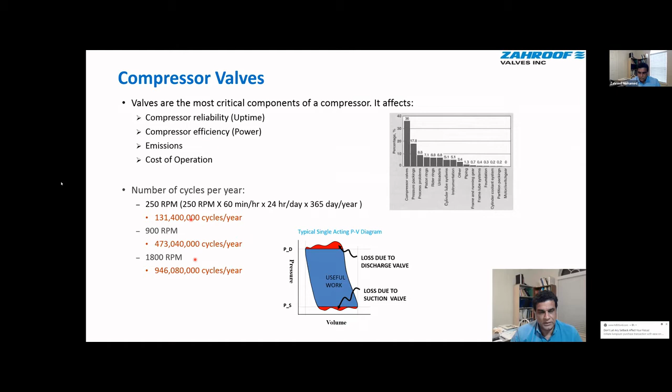This slide shows pictures of the typical conventional valves that you see today. On the left you have the plate valve, you have the ring valve, and then you have the poppet valves. In the case of all these valves, you have the valve seat, which is responsible for taking the pressure differential across the valve. You have the sealing element, which is the plate in this case, the rings in this case, and the poppets in this case, and the sealing elements are actuated by springs. The spring is guided inside the guard of the valve, and the guard is also responsible for controlling the lift of the valve.

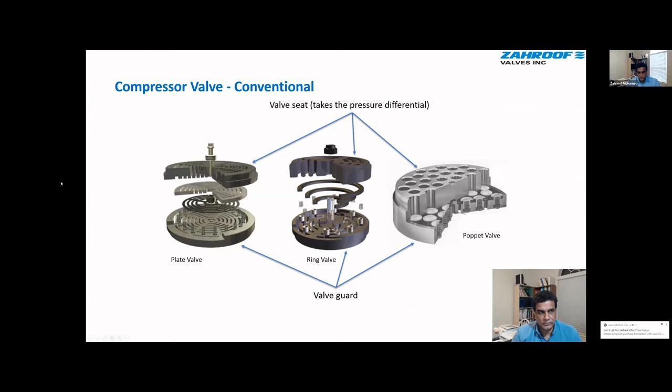This slide shows the evolution of valves over the years. The plate valve was invented in 1895, and if you take a look at the plate valve design, the flow of the gas through the valve hasn't changed since it was first invented. Similarly, the same is true for poppet valves, which were invented in the 1950s, ring valves, introduced in the 1930s, and channel valves in the 1940s.

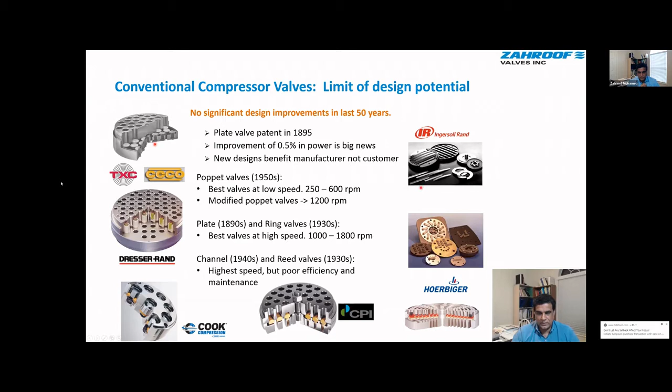So the major issues with conventional valves are as follows. Number one, when the valves fail, they have to be serviced. In order to service a conventional valve, you need to take it outside of the compressor, send it to a precision machine shop, and there they will check the valve seat and guard against a drawing to see whether it's within spec. If it's within spec, you would machine it and bring it back to its good condition, and you would always replace the internals, which is either the plate, springs, etc.

And this requires a long lead time. It also requires skilled labor, and it also requires the user to have a full set of spare valves on site. The other big issue with valves is that it's the number one cause of unscheduled shutdowns.

The mean time between service in a valve really depends on the application, but in the case of upstream applications where the quality of the gas can be bad, it can be anywhere between 3 days to something like 6 months. In pipeline transmission applications where the gas is clean, in the case of a high-speed compressor, the service interval is more like a year for valves. In downstream applications, typically it's about 2 years, but in dirty applications, you see things like a couple of months.

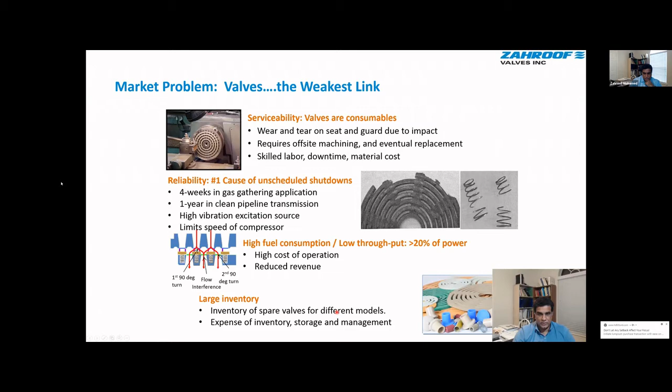So the StraightFlo valve is a patented drop-in compressor valve, and there is no requirement for modifying the cylinder of the compressor. The smallest diameter it comes in is about 1.5 inches, about 38 millimeters, and there's really no upper limit. We have valves which are more than 14 inches in diameter.

There are more than 15,000 of these valves currently running in the field, and they are in all brands of compressors, including Ariels, Coopers, Dressers, Ingersoll Rands, etc. These valves run in applications ranging from 200 RPM to more than 3,600 RPM.

The maximum pressure differential that a valve can take across a single valve is 4,350 psi, about 300 bar. And the temperature it can be used in is anywhere from cryogenic minus 300 degrees Fahrenheit to 500 degrees Fahrenheit continuous temperature. These valves have an industry-leading 10-year warranty on the stainless steel housings. In slow speed applications with pipeline quality gas, we also have a warranty of 5 years. And in downstream applications, typically, it's about 3 years.

These valves actually improve the reliability of the compressor by anywhere from about 5 to 15 times. That is the mean time between shutdown of a compressor due to valve issues. And we actually guarantee that this will be at least 2 times that of the previous valve for the same conditions.

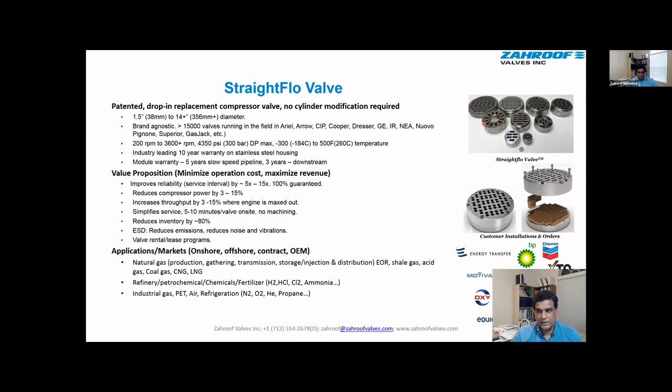So essentially these valves are modular reed valves. You have a valve seat, and we call this a valve carrier because it's really not a guard - its function is purely to carry these modules, and inside the valve you have a number of modules.

These modules are all the same size or dimensions on the outside, so whether the valve is 1.5 inches or 14 inches, it has the same modules in it, but the 1.5 inch valve has fewer modules than the 14 inch valve. These modules can be interchanged between valves, and they're held stationary between the valve seat and the valve carrier.

In order to service these valves, all you do is remove these modules using your hand. No special tools are required - you basically remove the bad modules and replace them with good modules. This can be done on the compressor site. There's no machining involved, very little skill involved, and it takes 5 to 10 minutes to do.

This picture shows a cross section of a module. You have a triangular part with reeds on either side, and when there's high pressure on the inlet side of the valve, the reeds deflect and allow the gas to flow through. The gas flows through in a straight line, with very little turbulence or mixing.

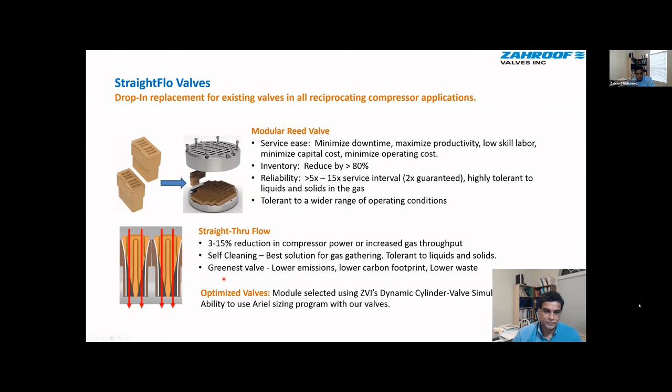When you do have to service it, you don't have to send it out or machine it - it's very easy to replace the modules. The inventory is low, so there are a lot of savings. You don't even have to leak test these valves like you would with a conventional valve, because every module comes leak tested, and it seals against the valve seat, which is not machined or changed from factory condition.

So the cost of maintenance of these valves, and of the compressor overall, is much lower than with conventional valves.

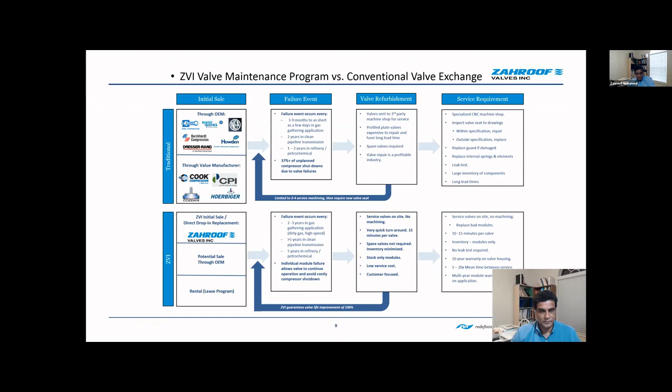This shows our dynamic simulation program, used to simulate a valve in a given compressor for a given application. The output includes the pressure on either end as a function of crank angle, the PV curves on the head and crank end, and the movement of the reed as a function of crank angle, or lift. No assumption is made that the valve is fully open when the pressure differential reaches a particular point.

This also gives you the rod load, which is a combination of the inertia load and the gas load. This is a picture of our standard valve, and this shows our valve with an integral cage. Our valves can have an integral cage because it's no longer consumable.

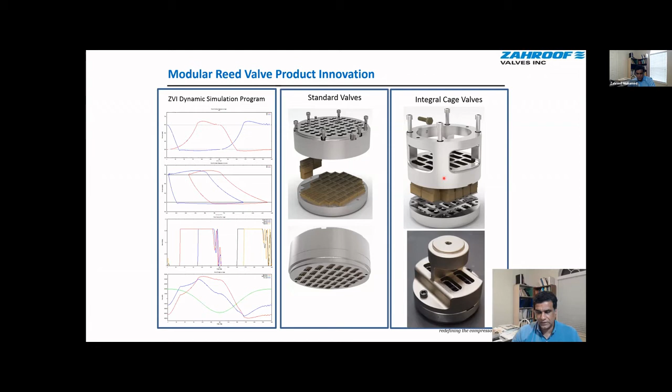This is the valve protection mesh, introduced two years ago, which protects the valve as well as the cylinder from liquid slugs and solid foreign objects in the gas stream. These are used only on suction valves, as the last line of defense, since these things can cause a lot of damage.

These are called high efficiency valves, because within a given diameter of a valve, we can fit a lot more modules, which increases the flow area much more than our standard valve.

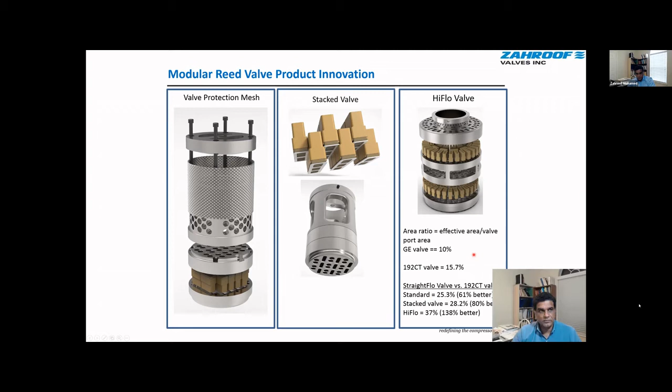Our valves can also be unloaded. In the case of a plug style unloader, we have a drop-in replacement valve which works with your existing actuator - you don't have to change your actuator.

We also have a drop-in replacement for finger style unloaders, using your existing actuator to replace your existing valve with finger unloaders. In fact, we have three different unloader technologies for our valves, which are much more reliable than a finger unloader, where a metal finger pushes down against a highly stressed plastic plate, which can cause reliability issues.

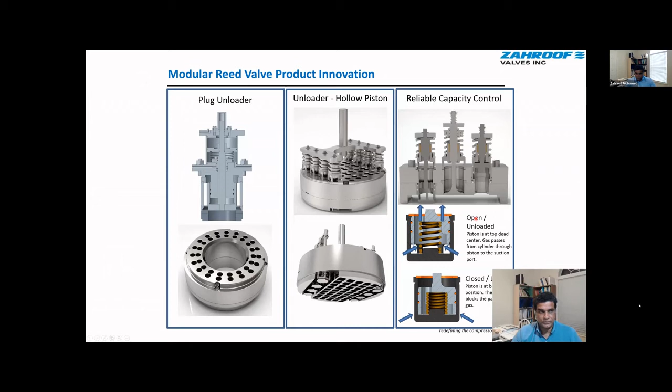We also have concentric valves. This one goes into a gas jack compressor, and this is a valve where we've integrated the valve cap as well as a cage, which goes into a Gemini H302 compressor.

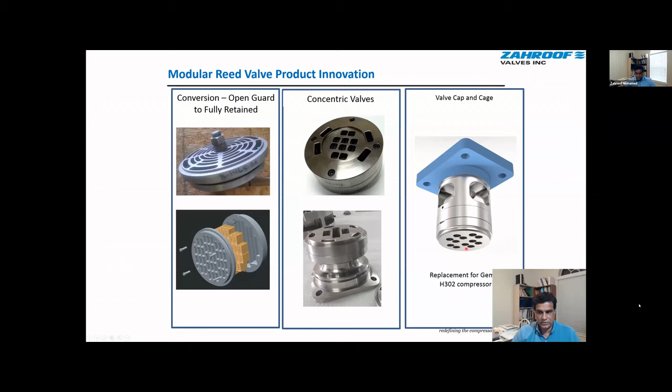These are products used pretty much in compressor stations. This is a replacement for a double deck valve, and this is a replacement for a parallel flow valve - actually a new valve with much higher efficiency than double-decker valves or parallel flow valves.

We're seeing a drop in power of about 15%, which can be converted to a 15% increase in flow per compressor in a compressor station. We also make scavenger valves for two-stroke engines, for instance, and these use exactly the same modules as our other valves.

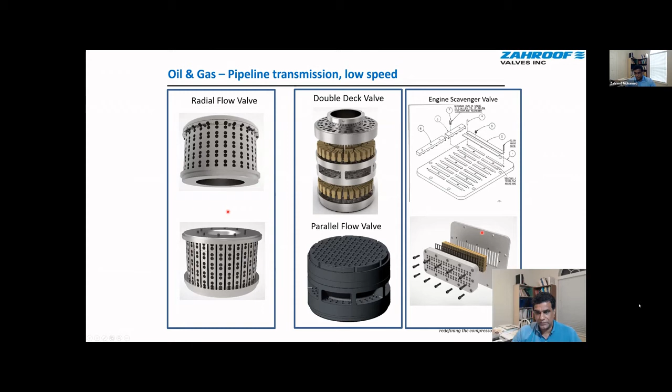So there are a lot of old compressors, especially Ingersolls and Dresser-Rands, in which the valve is retained by a jack bolt, and these valves are notorious for being difficult to maintain, with issues with emissions and difficulty in tightening the valve cap bolts versus the jack bolt. So we have a field conversion for this valve where we replace this jack bolt cage with a cage and a valve cap with an O-ring.

So we put in a conversion ring in the cylinder. There's no machining required, it's a drop-in kind of thing. It takes maybe 15 minutes per valve location, and we use a valve and solve the problem of maintenance and reliability that you have with jack bolt retained valves.

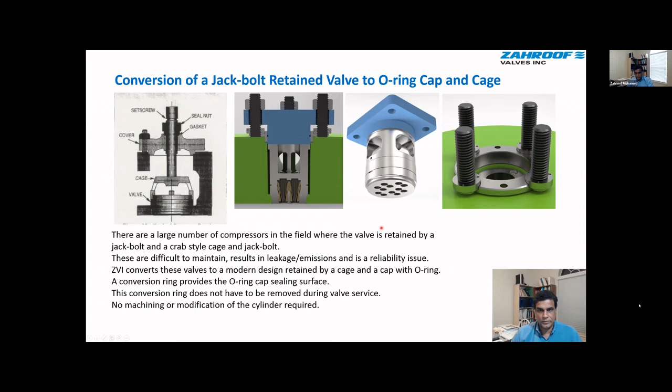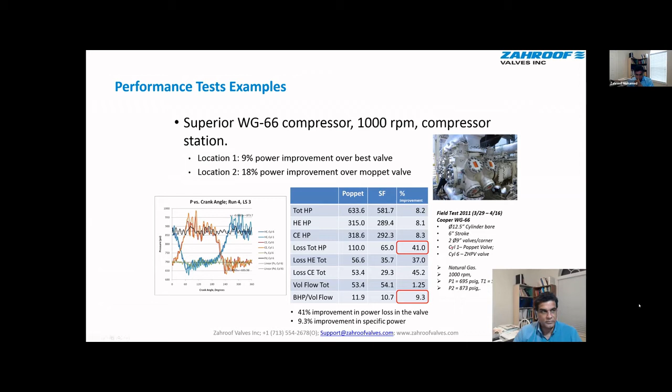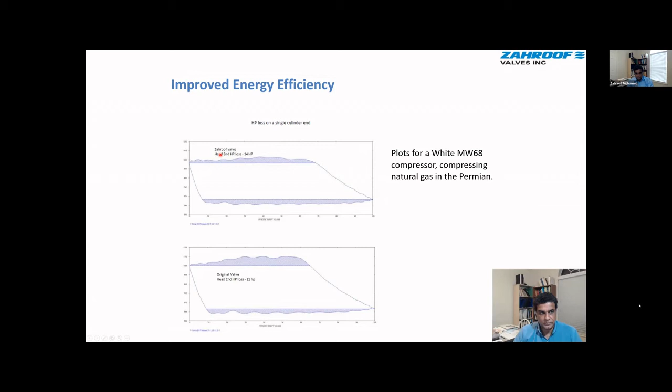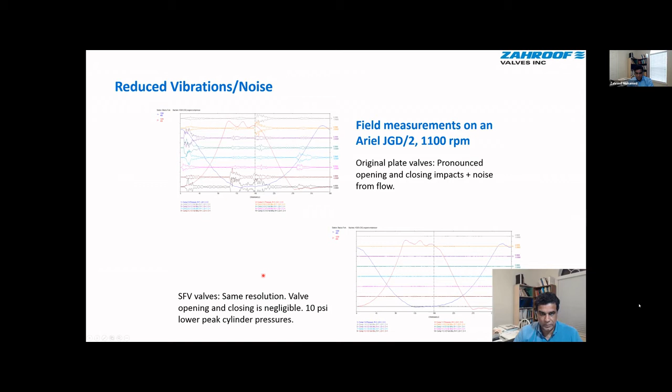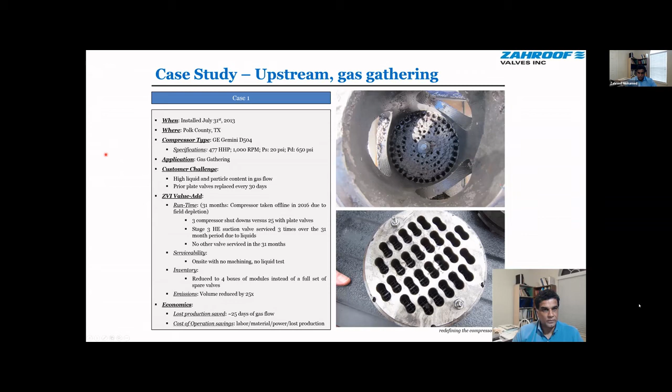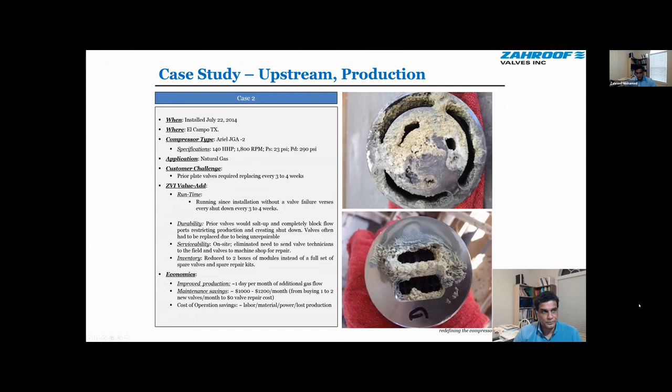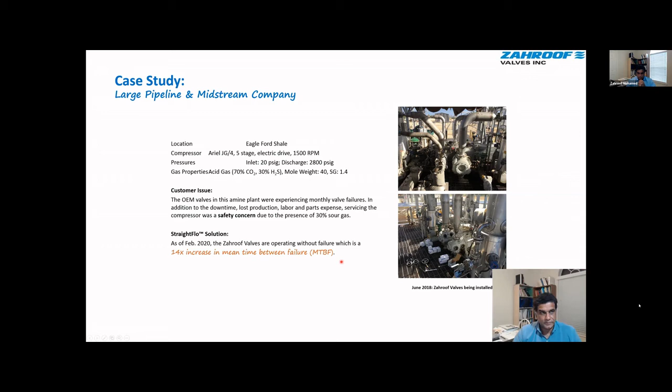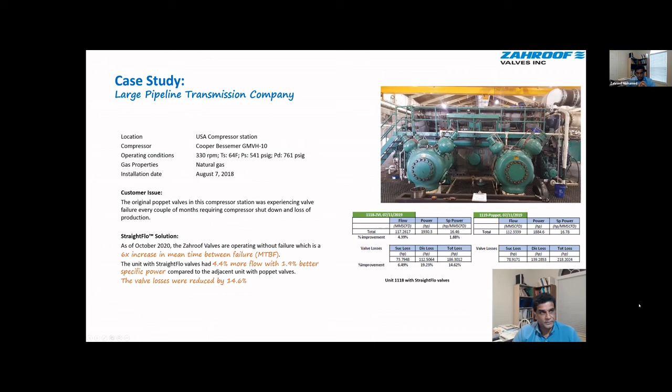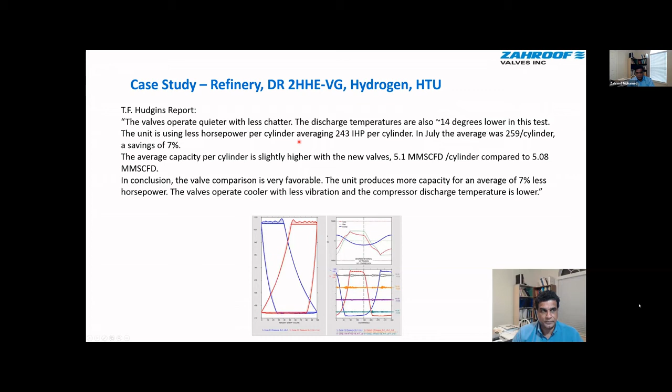Here's a refinery application where a hydrogen compressor, which was shutting down every couple of months, had the StraightFlo valve installed. It resulted not only in improved reliability but also reduced horsepower by about 7% on the compressor. Because of this improvement in reliability, several compressors in that refinery have been converted to StraightFlo valves, and these are some of the compressors and applications in which it's applied.

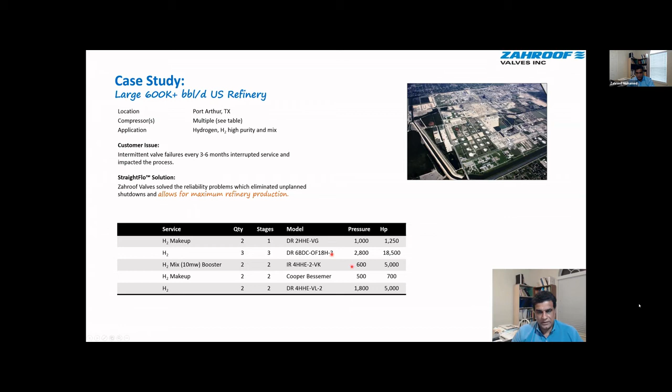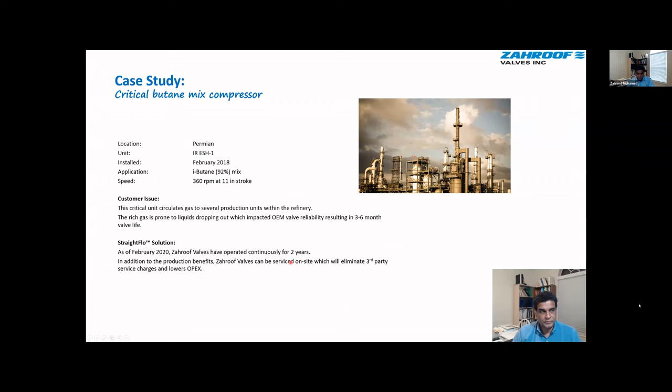To summarize, the StraightFlo valve is a drop-in replacement for existing reciprocating compressor valves. It increases reliability by a factor of 5 to 15 times, and we guarantee at least a 2 times improvement in the mean time between shutdowns for the same operating conditions. It's a much more efficient valve, resulting in lower valve losses and lower power - typically 3 to 15% lower compressor power depending on the application - and that compressor can be converted to more throughput if it's possible to increase speed or reduce clearance. These are also the easiest valves to service, taking about 5 to 10 minutes per valve on site, no machining involved, and you can reduce inventory by more than 80%.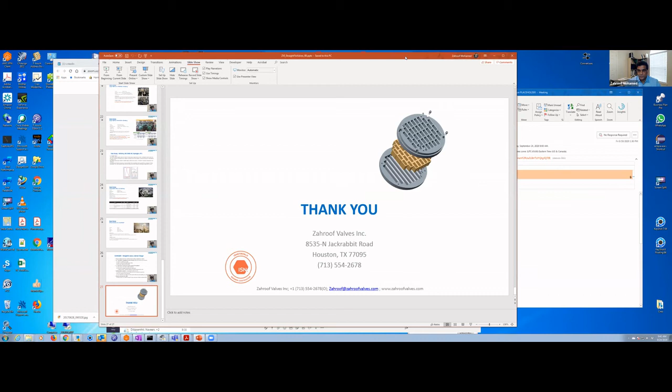Question: what is the impact of lubrication, and what changes to modification or lubrication requirements have you noticed? These valves can work in lubricated cylinders as well as non-lubricated cylinders. What we've seen is that in cases where valves have failed because of over-lubrication, these valves, because they can handle liquids better, last much longer in lubricated cylinders. But they can handle both lubricated and non-lubricated cylinders.

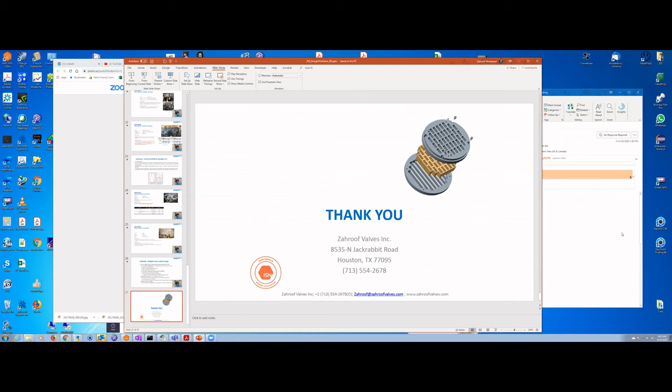I don't know, I can't see the chat side. Are there any other questions from anybody in the audience? If you guys are there and have a question, all the lines are muted, so please unmute yourselves or submit a question in the chat. I guess I'll just show you one thing. I can find it. I just messed up my...

Our valves improve compressor reliability, working well with clean gas, dirty gas, gas with liquids, gas with solids, shale gas, and multi-phase gas.

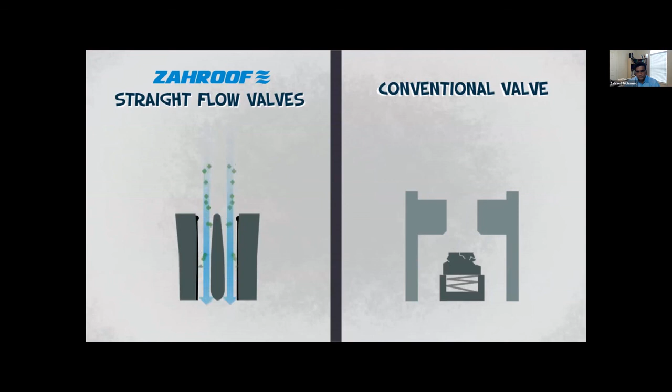So that's a quick sketch of how the valve actually operates, how the reeds actually open up and allow the gas to flow straight through. And because the flow goes right through the valve, there's nothing that it impacts against.

You can see that in the case of a poppet valve or plate valve, if there are any particles in the gas stream, it's going to hit directly against the plastic part, which is hot and not as strong as it is at room temperature.

Whereas in the case of this valve, once it goes through the module and the reeds are wide open, it just goes straight through. And if it hits something, it's hitting it tangentially on the stainless steel parts, which holds the strength even at high temperatures.

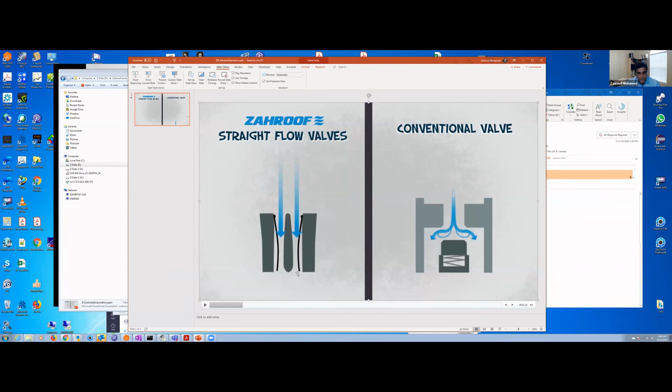And that's the reason why you have very high reliability compared to a conventional valve, even in the presence of dirt or liquids in the gas stream.

You mentioned earlier about rebuilding the valve, just changing the modules, removing a bad module and putting in a good module. What's the means of detecting good versus bad?

So again, we take advantage of the fact that the flow is straight. In the case of a valve, all you need to do is, before you even disassemble it, you just take it and look through the inlet of the valve against a bright light. If you don't see too much light, that means the modules are okay.

So just by looking through it, you can figure out which modules are bad. Then you flip it and look at the guard side of the valve, and there you can actually see the critical part of the valve, which is basically the reeds, how they come together. So you can inspect the reeds just by looking at it without disassembling the valve. That's how you would inspect it to see whether there's a bad module or not.

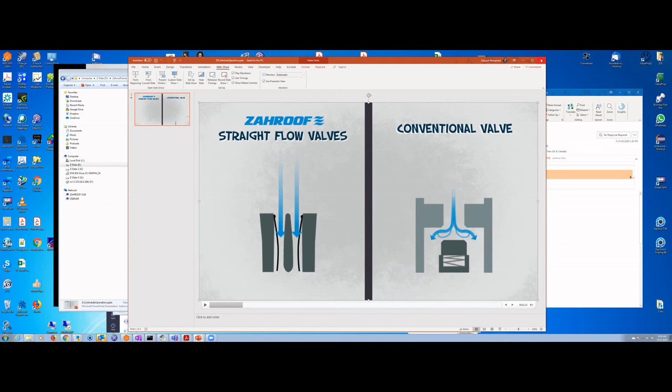We have a question about the materials. Is stainless steel the only material available for the reeds, or are there alternate materials? So most of the applications we've got stainless steel, which is for about 80 to 90% of the applications.

And then in the case of corrosive gases, for example, if there's sour gas, we have applications in gases which have more than 80% hydrogen sulfide. So there we have a special coating on the reeds.

And now that we are in chemical plants where we're actually handling gases like chlorine and hydrochloric acid, we've got some special alloy kind of reeds, as well as special coatings on the reeds to handle the corrosive gas. That's a very small percentage of the applications.

It's what you see in chemical plants, really. But for most of the other applications, the materials that we have in our standard valves can handle most of the gases that we see in oil and gas applications, as well as the most industrial gas applications.

And this is Chuck again. Are there any temperature or pressure ratio restrictions that you have to contend with?

No. So the modules are what limit the temperature of the application of the valves. And we can go down to minus 300 degrees Fahrenheit, so cryogenic, all the way up to 500 degrees Fahrenheit.